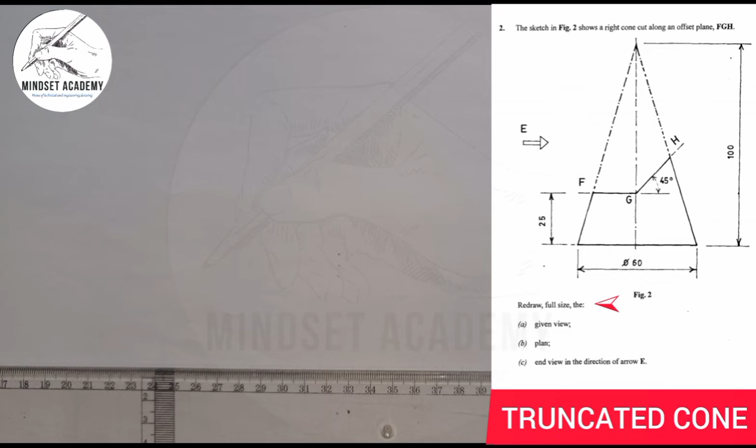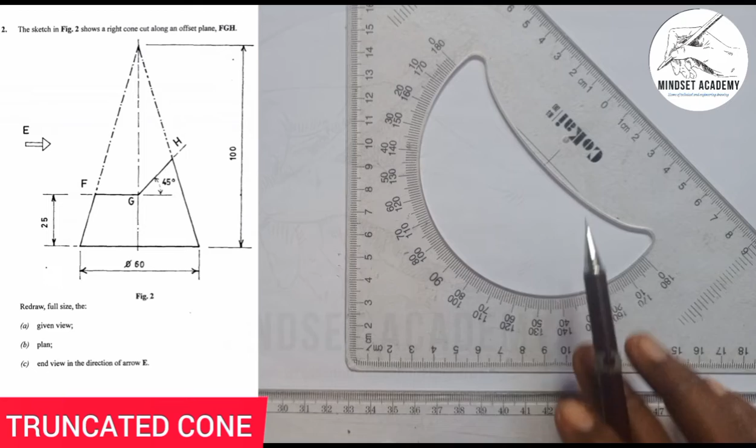Now, the first thing we are told is we should redraw the full size of this given figure. So the first thing I'll do is take my instrument and draw a vertical line this way. Then I'll draw a horizontal line this way.

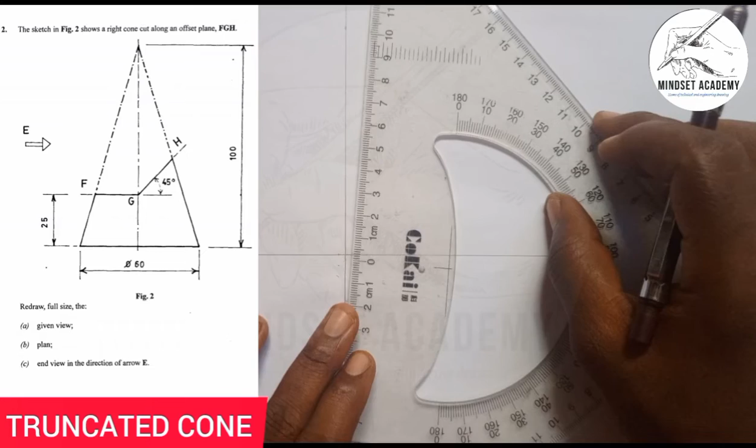The height given here is 100, so from this base here, I'm going to measure 100, from 0 up to 100.

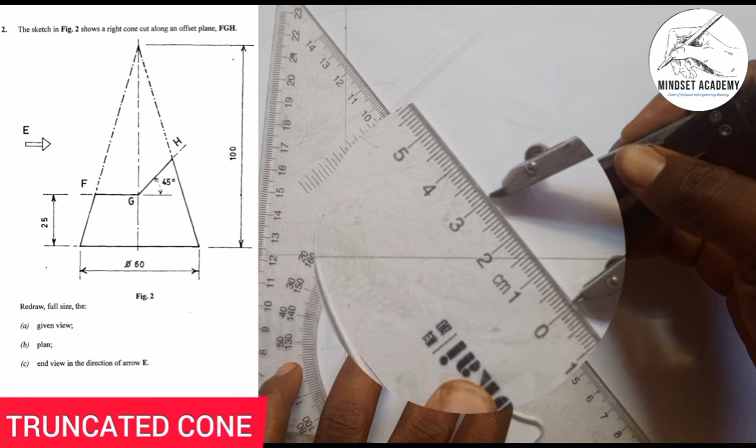The width here, the base, is a circular base, and that is 60 diameter. So I'm going to take half of 60, which is 30, from 0 to 3 is 30, and I'll place it here and mark it.

So these two ends, I'm going to call it 0, or better still I can call it 6 at this point, then 0 at this point, depending on what you want. But let's proceed.

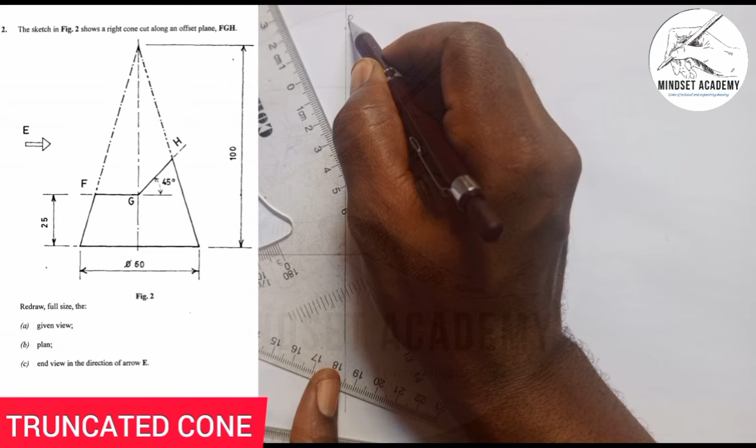Now we'll connect this end point. The top point here, let me call it G, or let me call it whatever I like - I'll call it R. So I'll connect 0 to R, faint line first, and I'll connect 6 to R.

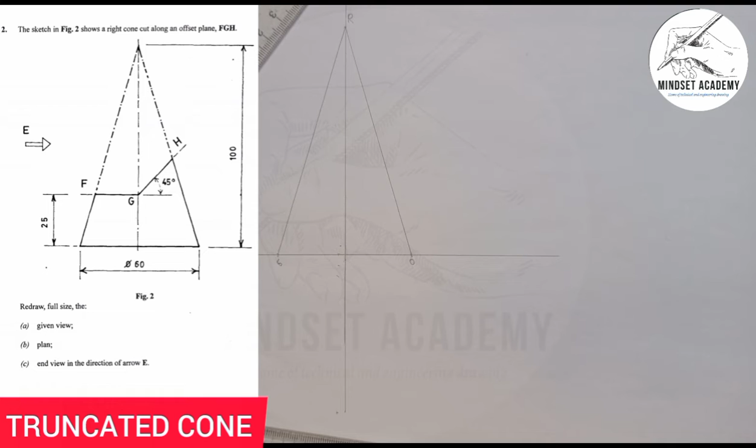Now what we are told is, for me to get to point F, I'm going to mark a distance from here to here, which is from here to somewhere around here. That's 25. So I'm going to measure 25, from 0 to 25.

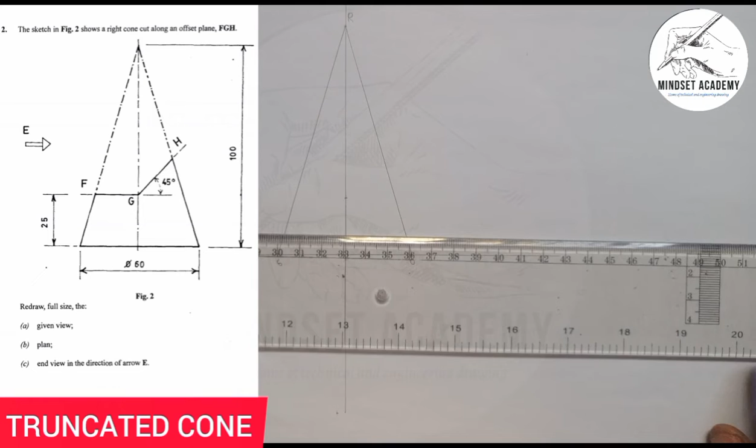I'll use my T-square to trace that point from 0 here. At this point, this is where it meets. That point there will be point F. Here is point F, and here is point G.

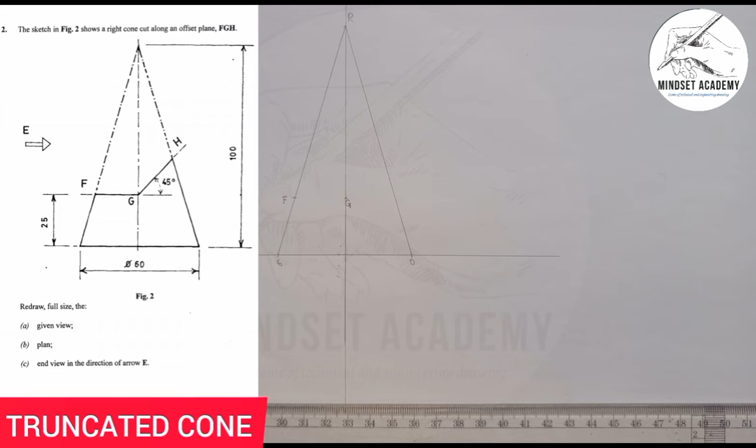Then the H is given to be an angle of 45 degrees. So what I'll do is take my instrument, place it on my T-square this way, move it to that point G, and draw an arc this way.

I can thicken it if I want to. So where it intersects, or where it touches this side of the triangle here, or right here of the cone, that will be my point H. So we have FGH.

So I can now thicken the rest. What I really need is all these points that I am bringing out. So this is the shape I actually need here.

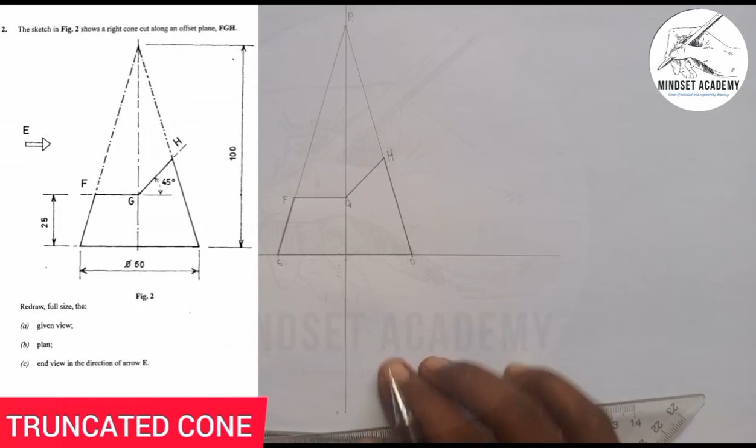Is that okay? We know the angle at this point here - this is the 45 degree. Whenever your set square, this part of the set square is inclined, that is 45 degree, as long as it is tangential to the T-square. So let's proceed.

Now, after doing that, the next thing is we should draw the plan. This is the given view we have reproduced. Now the next thing is we should draw the plan.

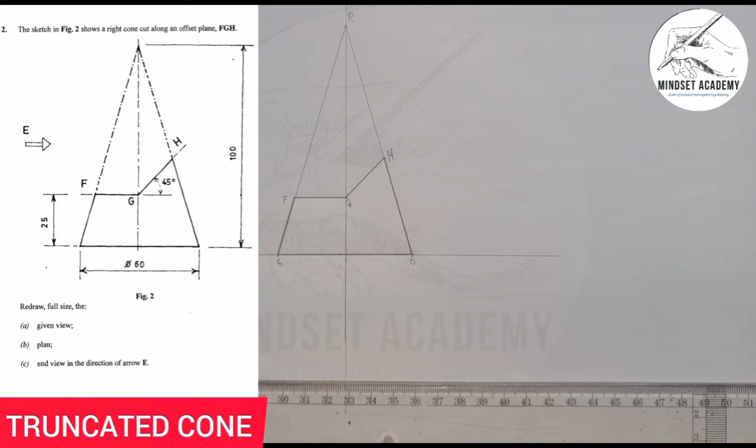So what I will do is take half of this here, half of this from this point here to this point. And I can pick any point I want to pick, any given point. I can come here and pick this point. Ensure that it's not touching the main figure here.

That is the most important thing here. So I'll just draw this way. I'll thicken it out. That's a circular base, that again. So this is where the center point is.

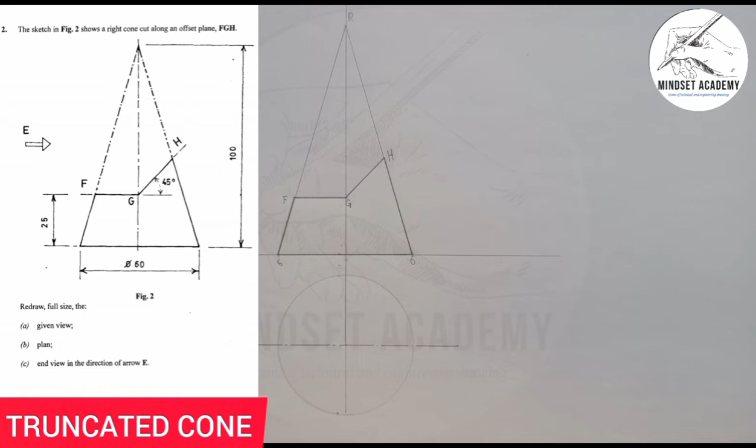I can just use my center line to bring it out. Now I've brought out this. Now the next thing is I should divide this circle into 12. So with the radius of from this point here to this point, I'm going to mark up.

I'll come here also, I'm going to mark up. I'll come here too, I'll mark left and right. Can you see that? So where they meet, I'm going to take my instrument and start connecting, making them pass through the center.

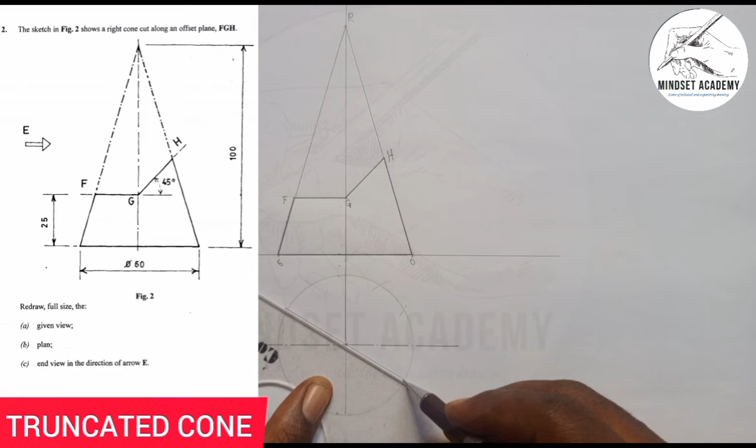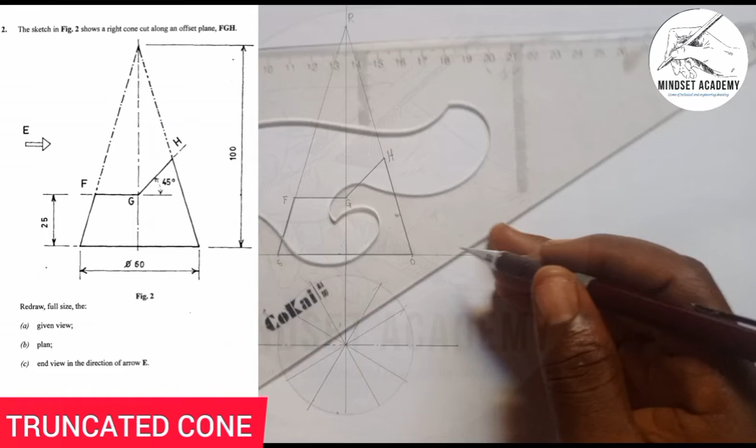With this, pass through the center. With this, pass through the center. With this, pass through the center. You can see that. So here will be...

0, 1, 1, 2, 2, 3, 3, 4, 4, 5, 5. Then we have 6. That is why earlier I said this is 0, 6.

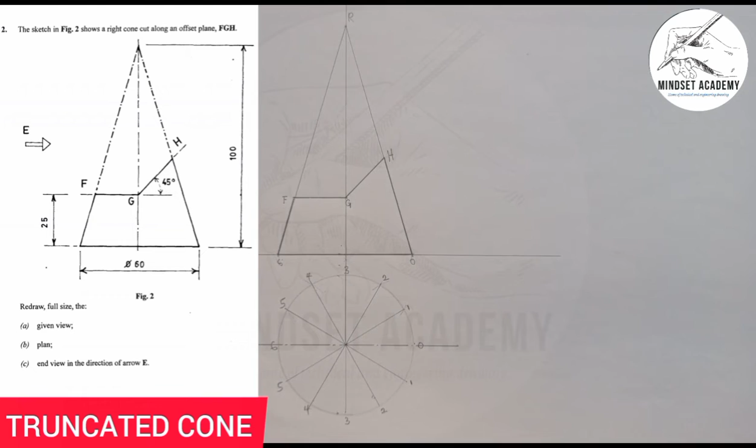Now what I will do is move all those points to touch the base of this cone here. So when I do that, I take my instrument, turn it this way, and each of these points will touch. This, they are all on the same point.

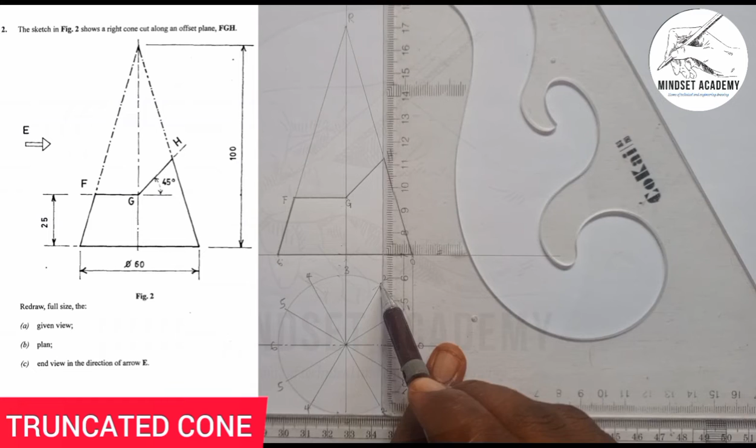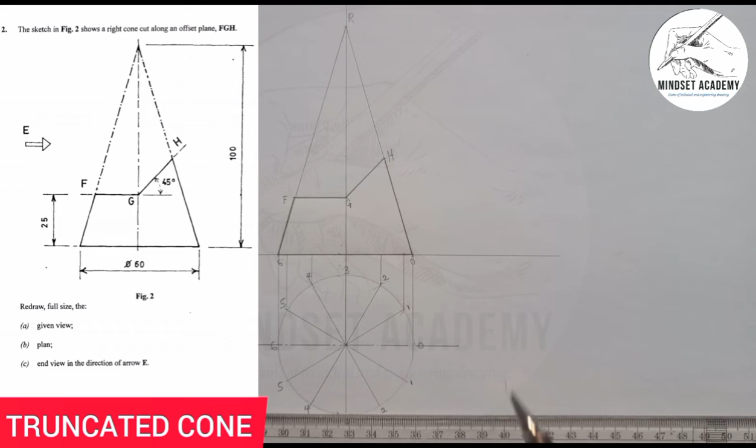You can see that. This is what we have. So that means this is 0, 1, 2, 3, 4, 5, then what? 6, as we have there.

Now for each of all these points, I will generate them, or move them, or connect them to the apex point of this cone R. When I do that, this is what I will be having.

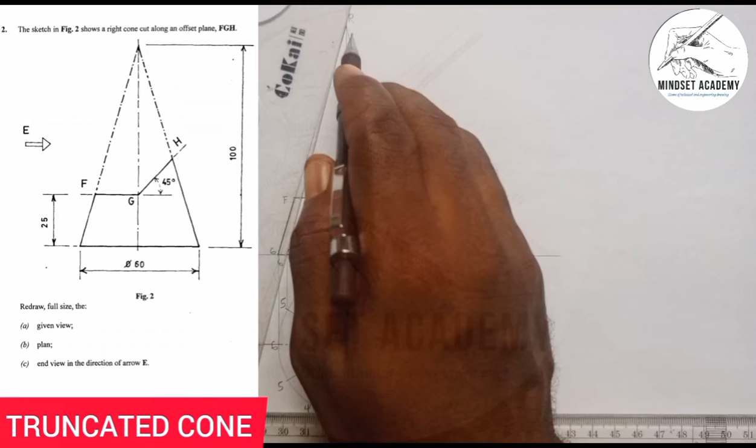So from 0 to this point, 4, 3 is there, 2, 1.

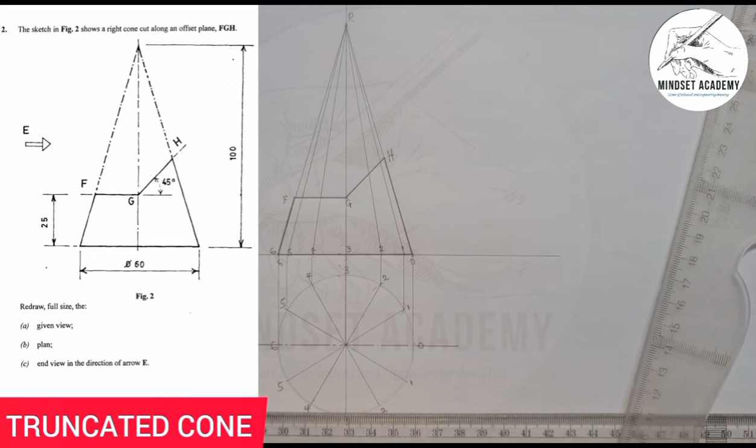You can see that. Now once I've done that, where each of those lines I connected to R meet the figure, I'll generate them down. Now look at what I want to do. I have 0, this is 0 here, then this is 1.

Look at the line of 1, it meets here, this point is also 1. So I'm going to bring 1 down this way. So where 1 meets 1, the line of 1 meets 1 at this point, and the line of 1 meets 1 also at this point.

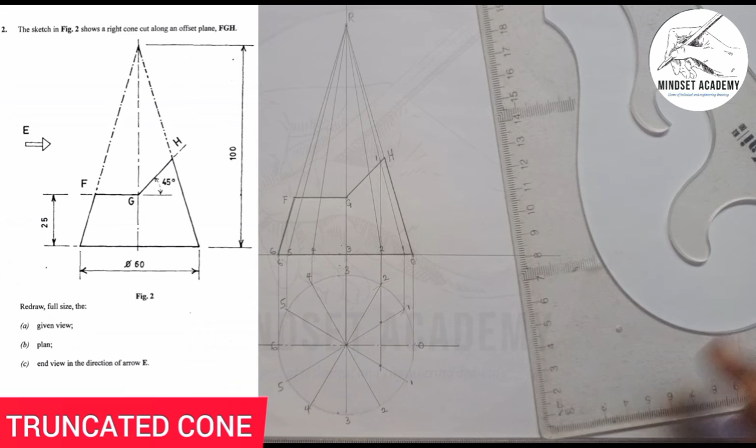Can you see that? I will come to 2. This is the line of 2, this is it, point 2, and I draw it down straight. So where 2 meets 2, the line of 2 is meeting 2 at this point, and the line of 2 is meeting 2 at this point, right?

I'll come again, 3 is already there. If I bring 3 out, it's just coming straight down, meeting at this point and at this point, right? I'll come and bring that to 4.

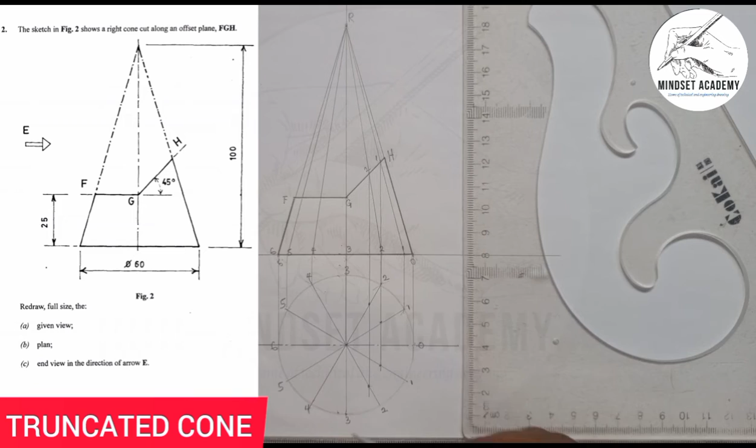This is the line of 4 meeting this point. I'll bring it down straight. So this is where line of 4, this is 2, this is 3, and this is 4 here. Line of 4 meeting 4 at this point, and also meeting 4 at this point.

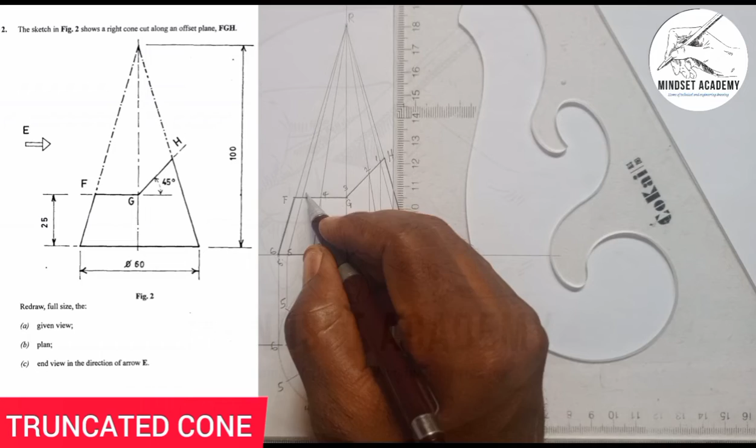I'll come again for that of 5 here. This is the line of 5 coming down straight this way. So the line of 5 meets 5 here, and also the line of 5 also meets 5 here. Can you see? Then we have what?

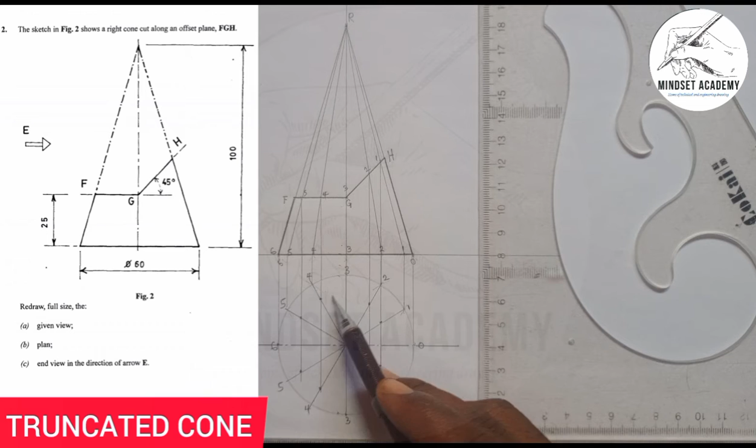6 at this point. So I'm going to use my French curve, and I'm going to join all these points together with my French curve, right? And this is what I will be having.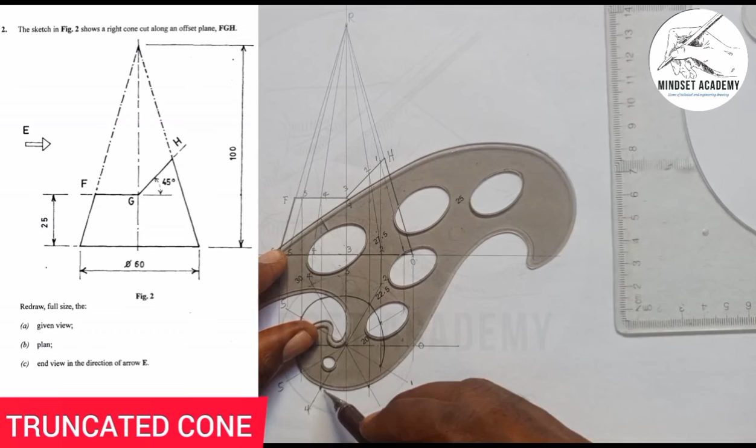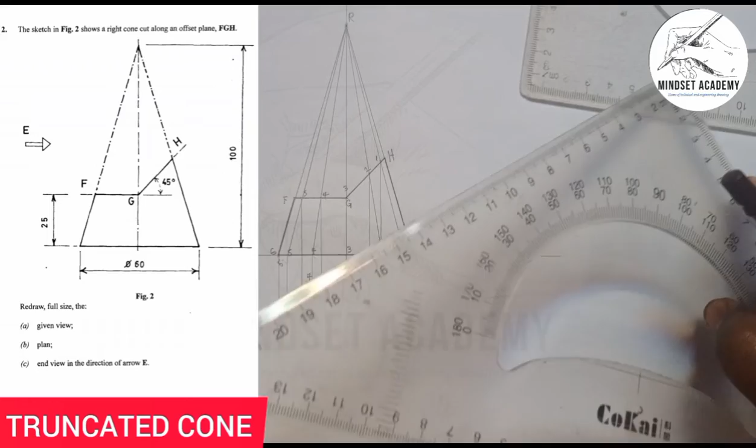So when I connect it, we'll have this then. So this is what we have here. So let me just section that part off. Let me section it out this way, because that's the part that is being - just section that out.

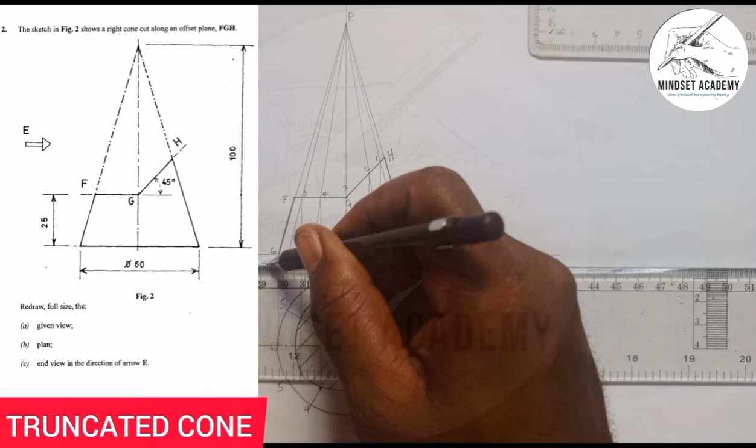So this is the plan that we are told to draw. Then the next thing is to draw the end view, right? So you can pick any center from this point here, and you should be able to do what I'm about to do here. Pick any given line, then we draw a vertical line there, this way.

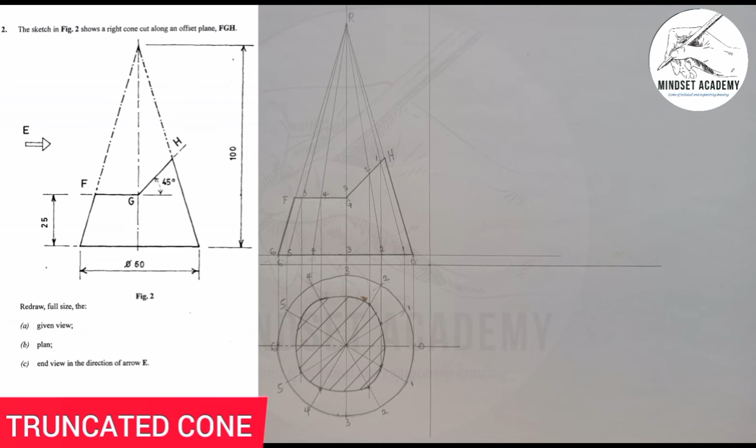You can see that. So the next thing that I will be doing is this point here that I need, right? And I'll take my 45 degrees set square. Then I'll bring this out this way, right?

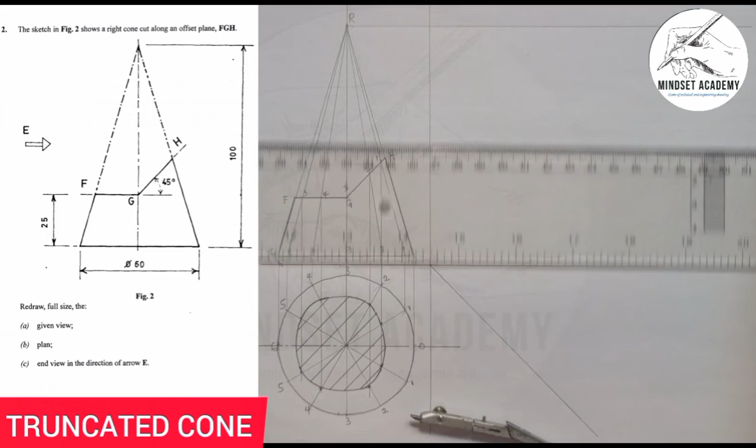And I'll come here. I'll bring this out this way from here. You can see that. I can easily extend this one too, as in this base of the cone, right?

Now what I'll just do is let me do out the point 3 first. Let's bring out the point 3 this way. This point is touching the circle, this line here, and 3 is touching this line here.

And we should know one thing for sure, that 3 from 3 to 3, since you are seeing from 6 to 0, right? So meaning that my 3 to 3 sitting as what? 6 to 0. You know, a circle is concentric, right? It is uniform around. So I'll just take this point up, right?

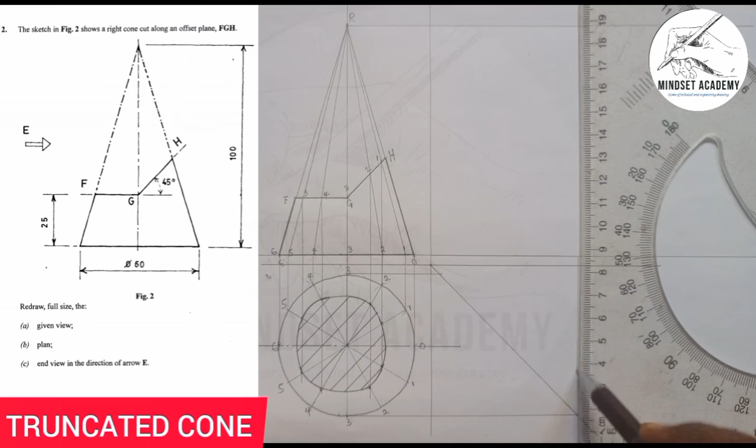I will project this up. Now project this up. So I'll just close that up this way, and taking it, right?

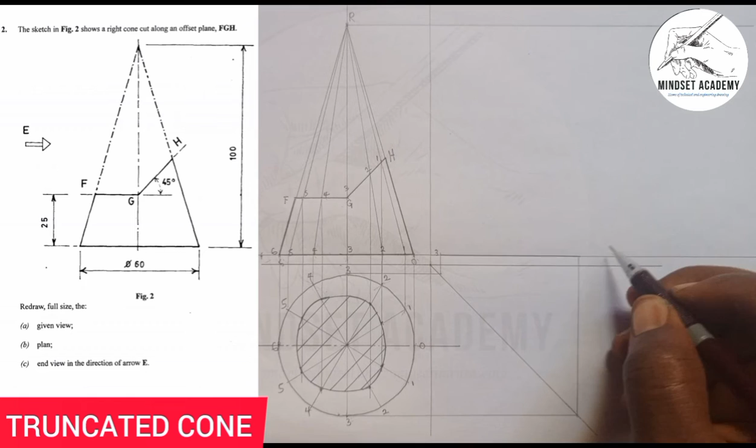That is point 3 to 3 this way, point 3 and point 3. This is you're saying 6 to 0. Is that again? Now the next thing is the midline here, G.

That is R here. The center point you're saying here is point R. So both R and G are on the same point here because they are having the same center here. So if I should project this to touch the inclined line here, I will take this upward.

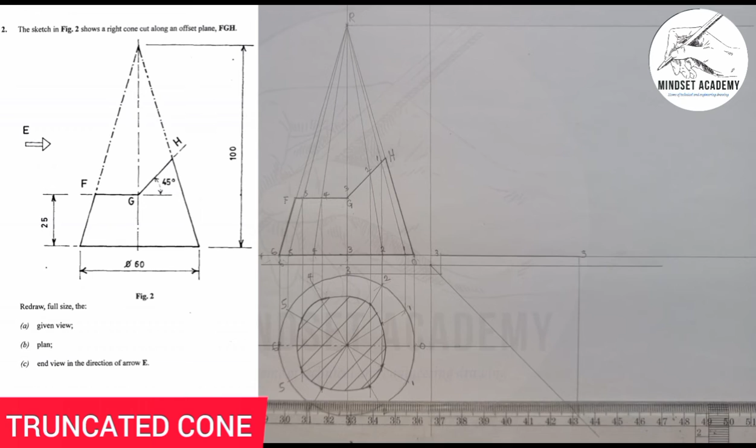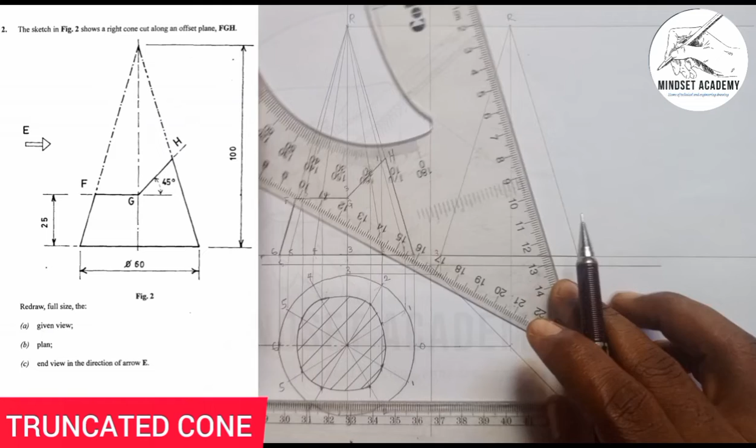You see that? This apex point is also point R. There is also what? Point R, and I will connect R to this point here, 3, and I'll put O also to this point here, 3. The same base, both 3, 4. I can try to see here is 6 and 0. So once you've done that, now see what I will do.

Each of all these points, I'll project them to touch this inclined line. So let's start with 2. So once I bring 2 out this way, let me not go to the inner one first. Okay, when I bring 2 out this way from the inner one, this is point 2, and this is also what? Point 2. You can see that this is 2, this is 2. So I'm going to project 2 out. This is point 2 also.

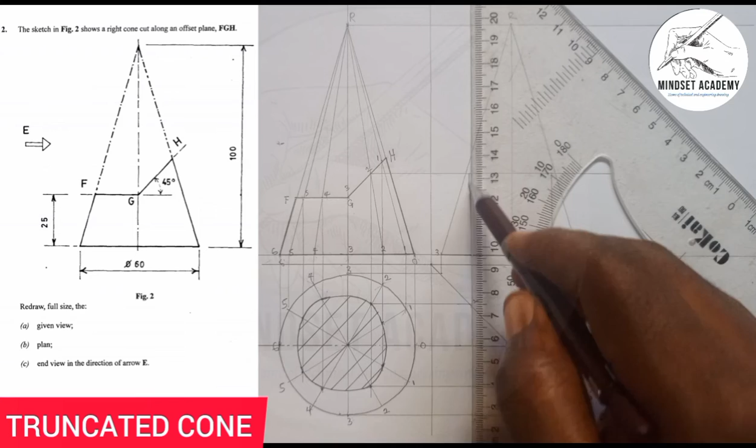So when I project this point out, look at what will happen. 2 will go and meet line of 2, so this 2 here will go straight up to meet line of 2, faint line. 2 will go up to go and meet what? Line of 2. So this point here is point meeting line of 2 here. Because it says the end elevation, now looking at this side from here. So don't forget this is my point 2 and my point 2.

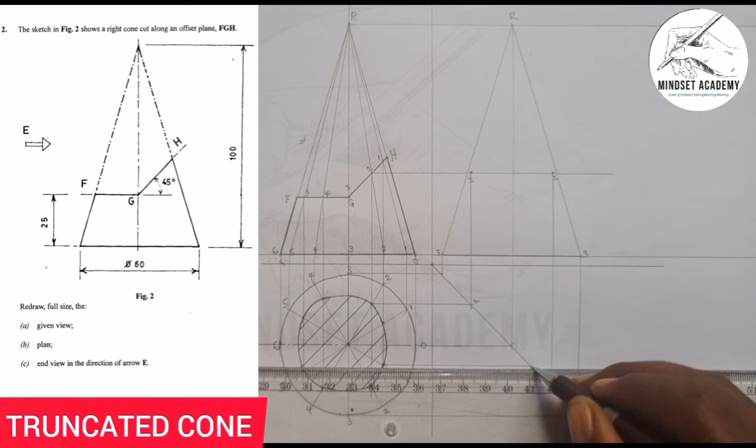So if I come again, I go to 1. This is the point of 1 here, right? I'll bring it to touch here, and the point of 1 also I'll bring it to touch here. So this is point 1, this is also point 1, and let me project the line of 1. This is the line of 1 here, so I'll project it this way. So if I project the line of 1 upward, 1 will meet 1 here, and 1 will meet 1 here. So this is another point here, point 1, point 1. You can see that?

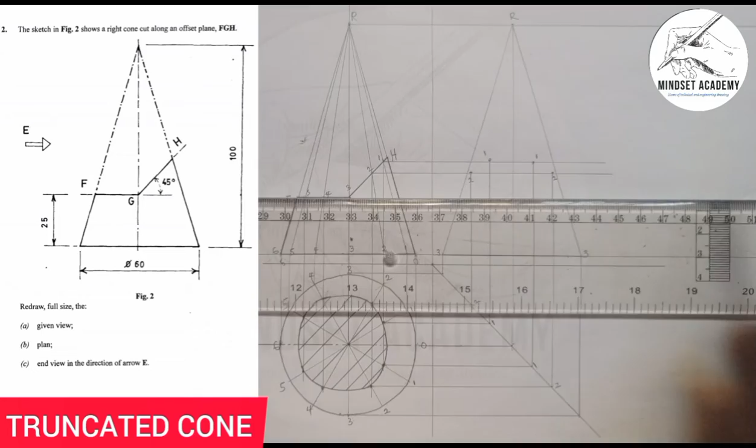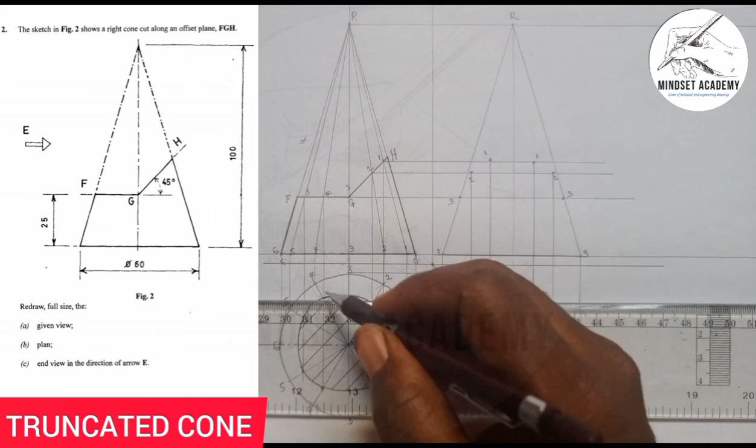Then I'll come again. We have 3 already. So look at the line of 3. We already have it. So if I project this 3 here, this way, it means 3 is meeting 3. So 3 here is meeting also this 3 here. Then if I go to 4, the line of 4 to touch here, the line of 4 to touch here, right? Then I'll project it up. 4 is coming to touch the line of 4, and 4 here also is coming to touch the line of 4. You'll be wondering what is happening.

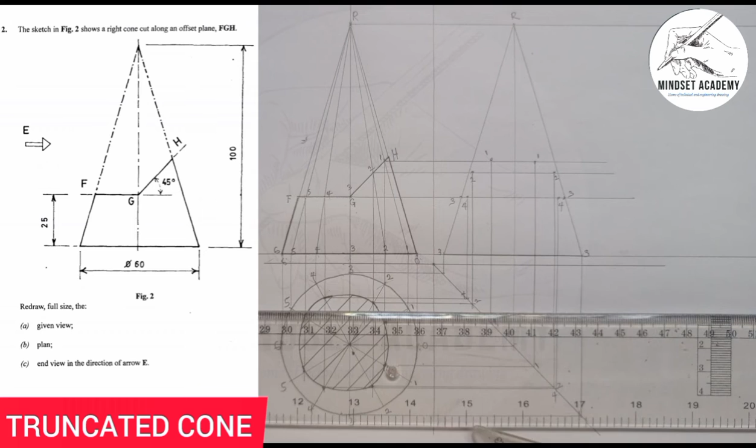So this is our line of 4. This is also line of 4 here. Notice that 4, 3, 5, and 6 are all on the same line, so all of them will fall on this line. So this point is the point of 4. This point also is the point of 4. If I do 5 also, 5 also will fall on the same point. So let's do that of 5. So 5 is coming to touch here, and also 5 is coming to touch here. So this is point 5, and this is also point 5, and I can easily take it up.

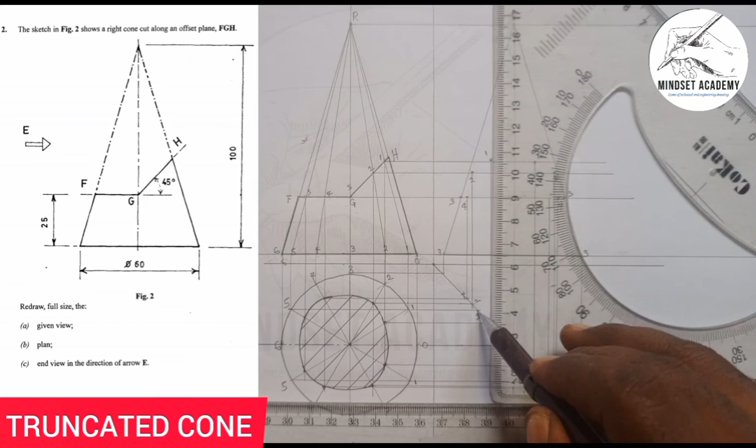So the 5 from here is coming to touch the line of 5. 5 from here is coming to touch the line of 5. They will all fall on the same line. This is the point of 5, point of 5.

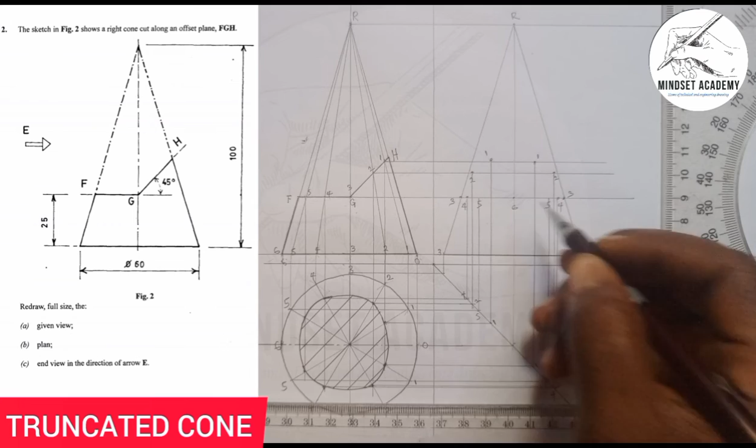So let's proceed. Now, after you've done that, they're all on the same point. If I go to the line of 6, this is the line of 6 here. 6 and 0 on the same point, coming to this point, and this is the line of 6. I take that. And also the line of 0, and this is 0 here. If I bring that up, this point here is our line of 0, right? Because this is 0 and 6 on the same point.

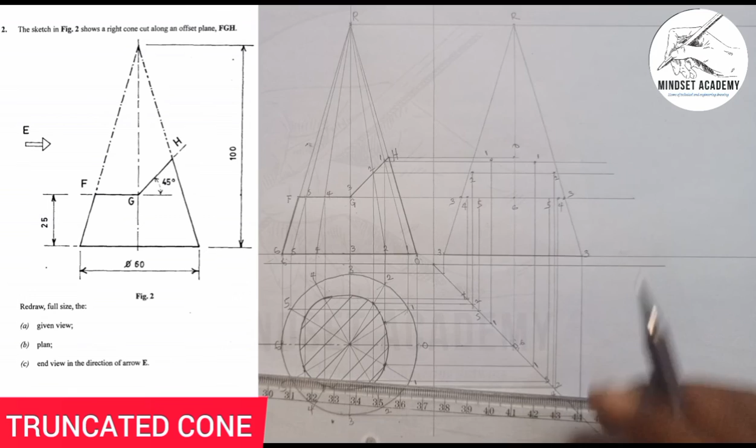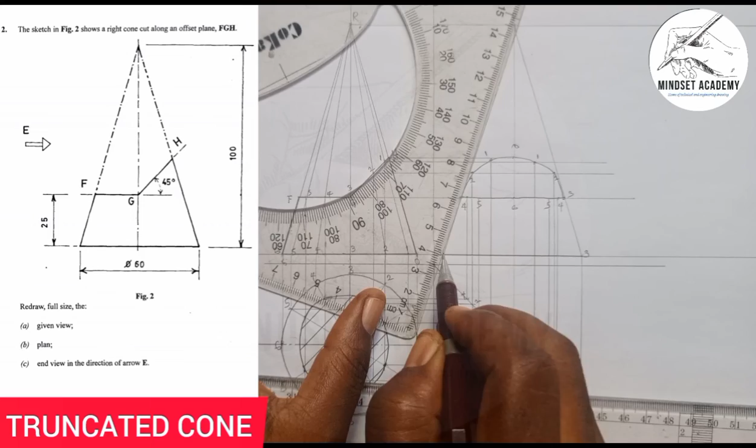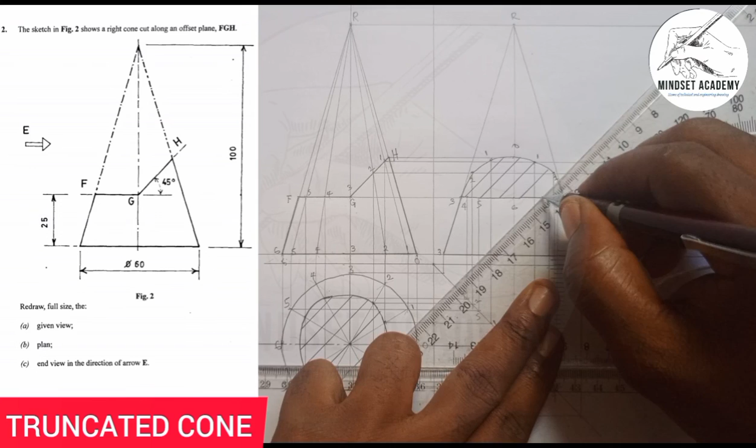Now I'll take my French curve and I'm going to join. First of all these are coming together. If I come from here, this is coming to this point. I'm joining here. And this is just going straight down here. So you join all these points together. And you can easily bring this down here, this way, and also this down here this way. And I can easily section the sectioned part, from here, this, this, at any given distance. This is what we have here.

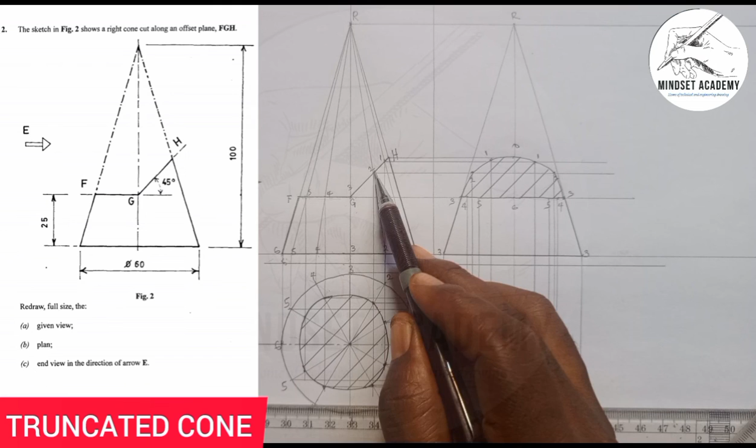So when you look at it from this side here, you're going to see all these points, but you cannot see 5, 4, and 3. You see that 3, 5, 4 are all straight, so you cannot see them here. But you're able to see 3, 2, 1, 0. So this is the 3, 2, 1, 0. This is the front elevation, and this is also the plan, and this is our given figure here. Is that taken?